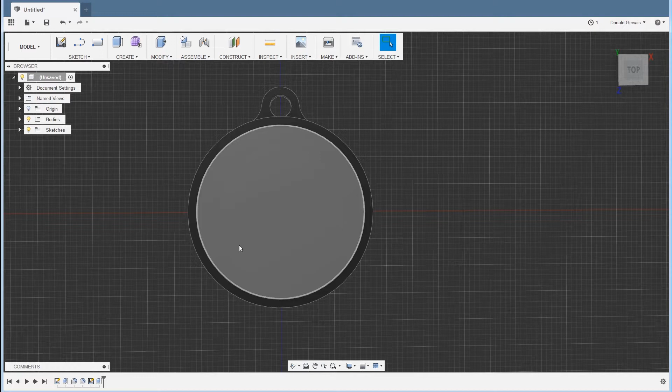Hello, and welcome. Today I'm going to help you design a charm template like this one right here, so that you can design something in the middle and wear it around your neck or as a keychain. This template is really strong and it's a perfect size.

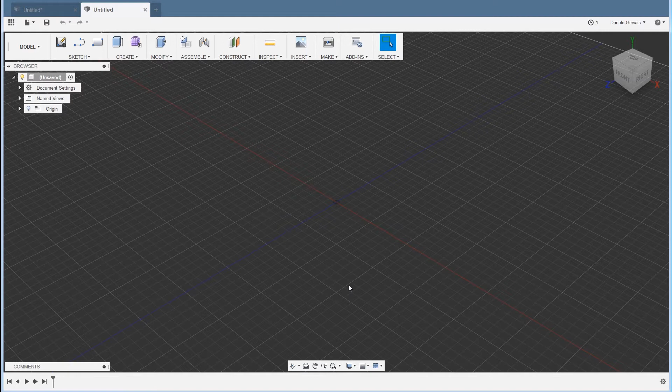So let's get started. First, I'm going to start a new document or a new design. When you start a new design or load up Fusion 360, you always get this view, and it's difficult to get started with, so I like to click on the top so I can get the top view, and then I'm ready to start.

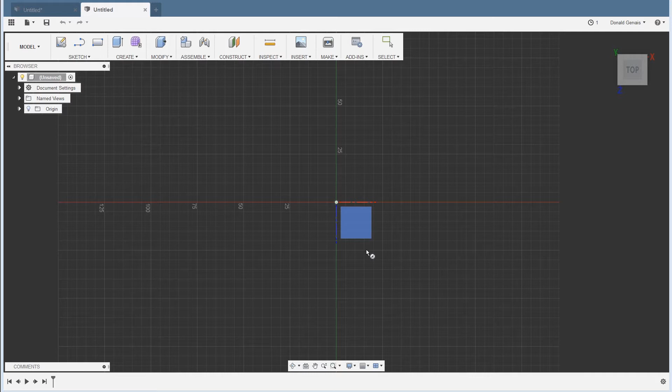We're going to begin with a new sketch with a circle, center diameter circle. As I told you before, Fusion 360 wants to know when you start a new sketch on which plane or surface you want to draw. There's nothing else than a plane, so I'm going to click. Now I'm ready to draw the circle.

I'm going to hover to the middle, click and move out. Our first circle should be 34 millimeters in diameter. Enter, and then I'm going to click somewhere to lock it in. There we have our first shape.

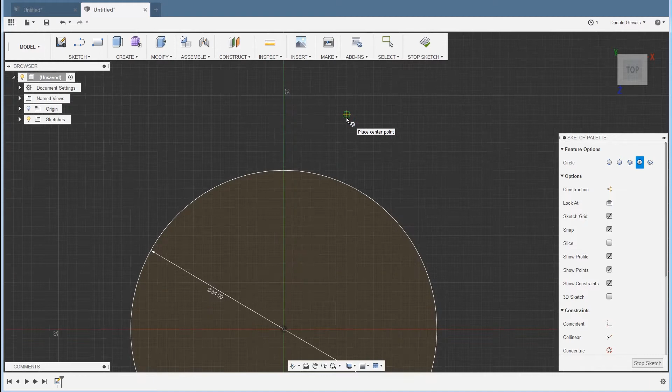Next, we want to draw the two circles that are going to make the loop for the chain to go through. I'll zoom more and just go random on where I draw them, then move them later. Click, and the first circle is going to be the hole for the chain, which is going to be 4 millimeters. Enter. Click to lock it in.

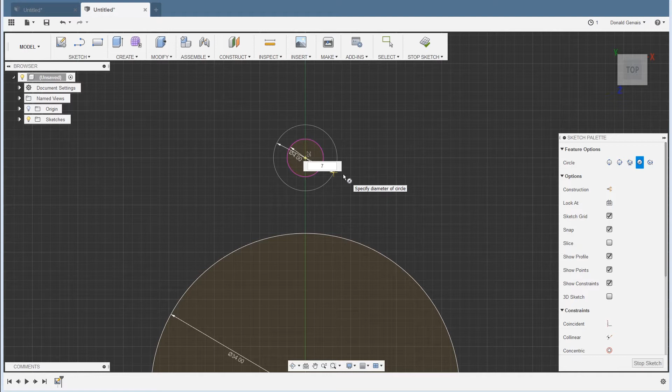I'm still under circle sketching, so I'm going to click on the same center again. This one is going to be 7 millimeters in diameter. Enter, click to lock it in. There you go. I don't need the circle tool anymore, so I'm just going to click escape.

If I click in the middle and move it around, it's kind of really difficult to achieve what I want, which is having this circle touching this one. If we do it by hand, it's going to be impossible. There's a trick to it.

If I select this circle right here, and then click and hold down the control button on my keyboard, then select the other circle, now both of them are selected. Then I'm going to scroll down on my sketch palette until I see constraints, and then tangent. Look at that little picture here. I'm going to click on that and watch closely what's going to happen.

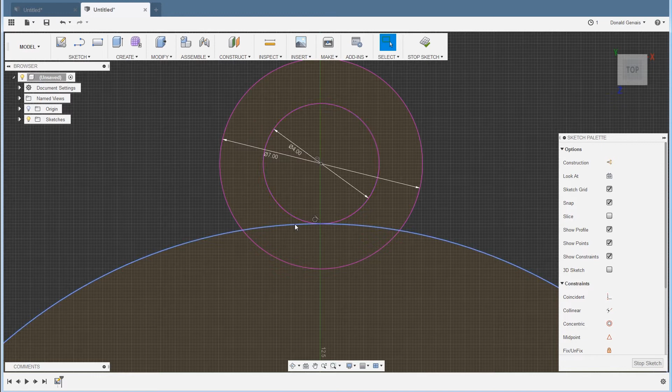Pure magic. Now we have this inner circle perfectly touching our outer circle, and we are ready to extrude. So I can come to create, and either click on the extrude shortcut or create extrude.

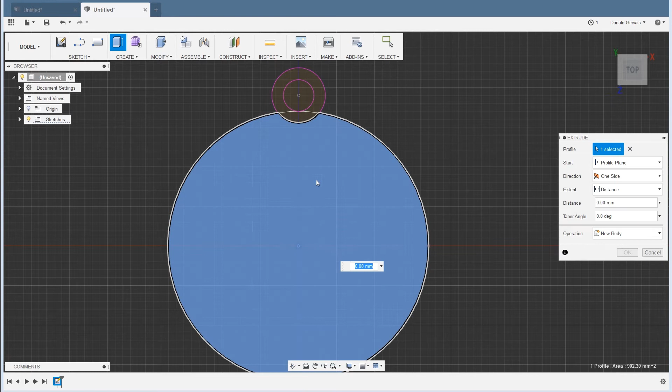It wants us to select what we want to extrude, so this, but not only this little part, and of course a little roundabout over there. We want to extrude by 2 millimeters, so 2, enter. Let's take a look here by rotating it to make sure that we have a volume to this. Oh, that looks great. Let's come back to our top view.

If we left it like this, once it's printed, the plastic would be a little bit weak here, and it also doesn't look so good. So let's zoom in, and we're going to add basically a fillet right here. You're going to see how that's done.

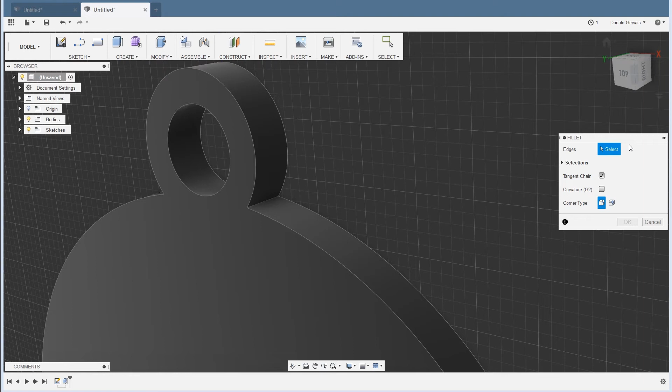So we're going to go to modify menu, fillet. It wants us to select an edge. We're going to select that edge right here. And then we're going to enter 4 millimeters. Enter. Take a look at this.

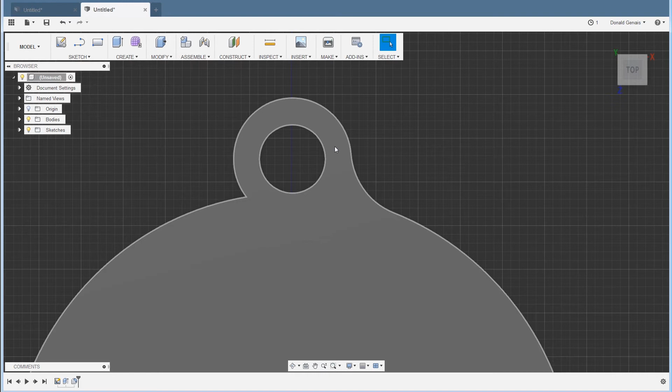Let me just put it in top view. Look how organic this curve looks compared to this. That's not only going to make our printed part a lot stronger, but it also looks much better. Let's do the same thing on the other side.

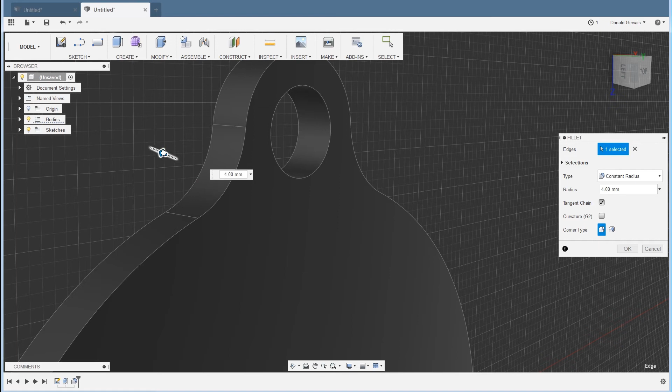We can select it first if we want, and then go to modify, fillet. You can enter 4 again, or if you prefer, you can pull on this arrow until you get to 4. It's a little bit more difficult, but it's kind of satisfying. Enter, top view, and we have our very basic shape for the template of the charm.

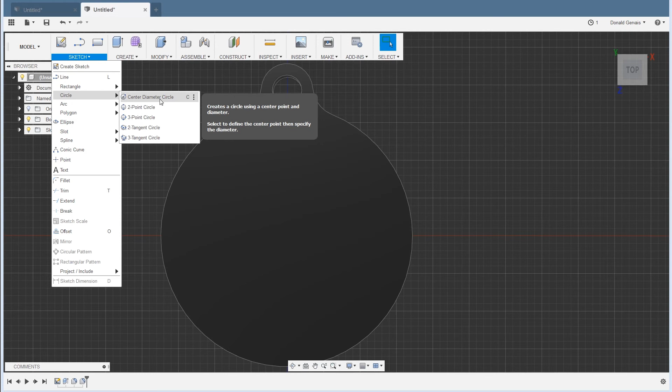All we have to do is kind of a ring around it, and we're done. We're going to create another sketch, circle, center diameter circle. Fusion 360 wants to know, do we want a plane, do we want a surface? We want on top of this surface, so I'm going to click anywhere here.

Not zoom in that much, I guess. We're going to use the same center, just hovering until it snaps. And then I'm going to move out to our original 34 millimeters. You're going to feel when you move around, it snaps right there at 34. You can click on that.

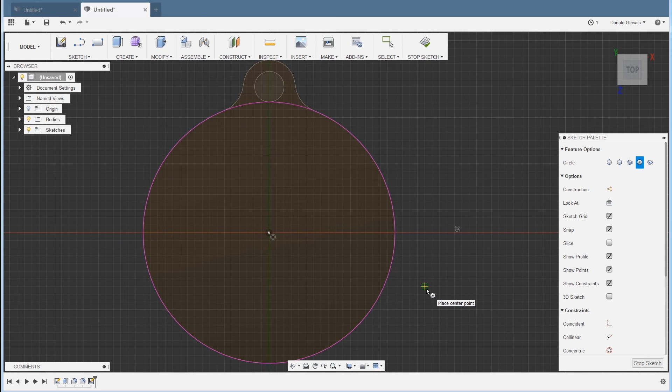And then we're going to do our very last circle. Same center. This one you're going to have to type in, that's 31 millimeters in diameter. Enter. I'm going to click the mouse to lock it. And that's it. Let's do our extrusion.

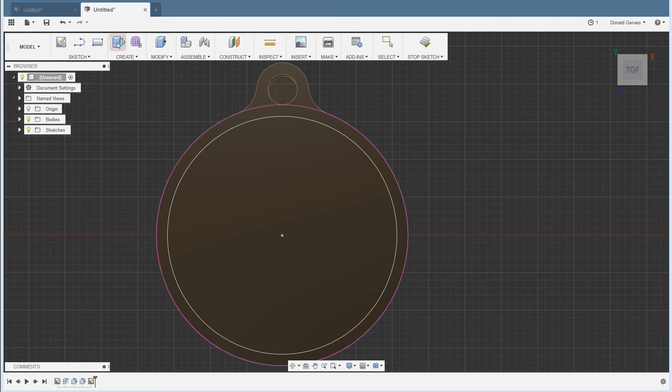Extrude, this part right here. We're going to extrude that by 2 millimeters. Enter. And this finalizes our template for our charm.

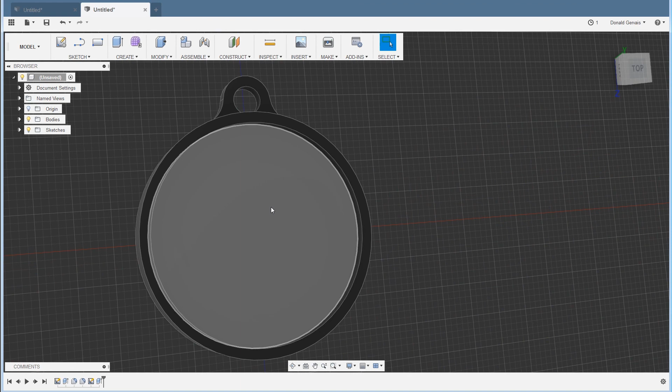At this point, of course, you can save it so you have your template that you can use every time, so you don't have to redesign it. And you can start designing your very favorite thing that you want to actually display and wear everywhere.